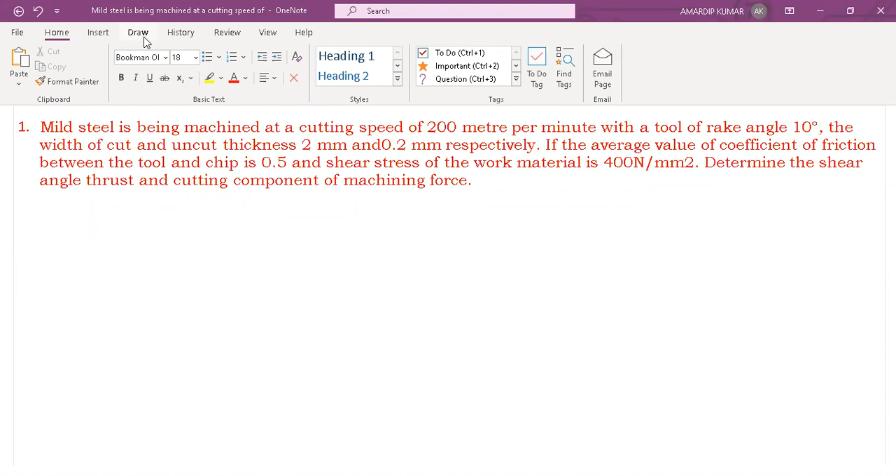Okay, fine. So these are all machining problems. We have already discussed the theory part. So we shall start from this. This is in fact the second problem. Mild steel is being machined at a cutting speed of 200 meter per minute. Means cutting speed is given to you, that is 200 meter per minute, with a tool rake angle of 10 degree.

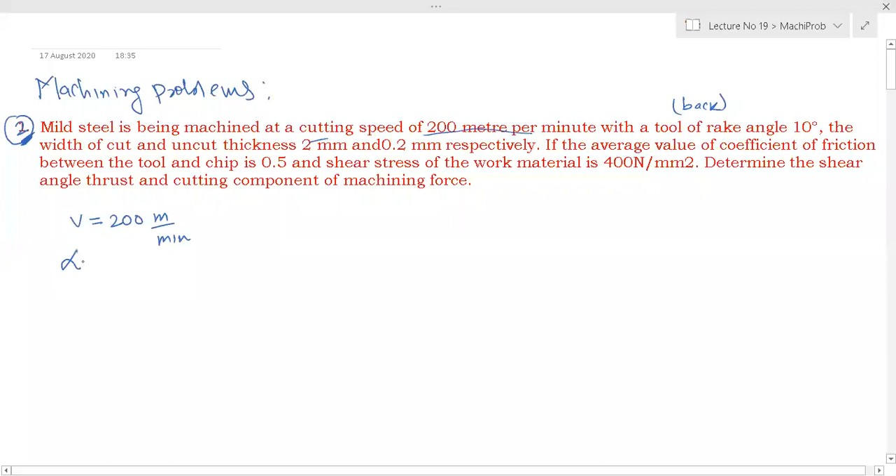So there are two rake angles basically. One is your side rake angle and one is back rake angle. When nothing is mentioned, you assume it is the back rake angle, because back rake angle is the most important angle. So this is back rake angle, that is alpha, that is 10 degree. The width of cut, that is W, is equal to 2 mm.

And thickness means it is not chip thickness, it is your uncut thickness. T naught is 0.2 mm. The average value of coefficient of friction between tool rake face and chip is 0.5. Mu is given, that is the coefficient of friction between the rake surface of the tool and chip, because chip flows over the rake surface of the tool and there is friction, and that coefficient of friction is 0.5.

And shear stress of the work material is 400 Newton per millimeter square. Shear stress is given. Always be careful. Suppose they have given you the normal stress or principal stress, you have to be very careful, because in the GATE examination, or any examination, your brain simply thinks, oh, it is a stress, and you don't think much. So for shear stress, you always take half of the normal stress. That is equal to 400 Newton per millimeter square.

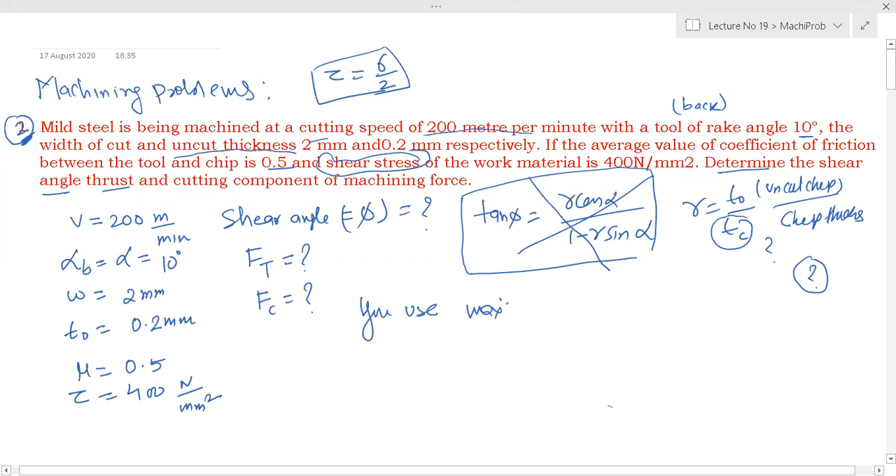So when you don't have information, you use the maximum power condition case. And you know in the maximum power condition, what is the phi relation? 2 phi plus lambda minus alpha is equal to pi by 2. So you use this relation, and pi you take as 180. And what is lambda? Lambda is your friction angle. So tan lambda is equal to mu.

You know what is friction angle? Friction angle is basically the angle between normal and resultant. This is your resultant and this is your normal. This is your friction F. So this angle is your lambda by the definition. And what is R? R is equal to F plus N. This is F, this is N, this is R. So tan lambda is equal to mu. You can calculate lambda. And alpha is given to you.

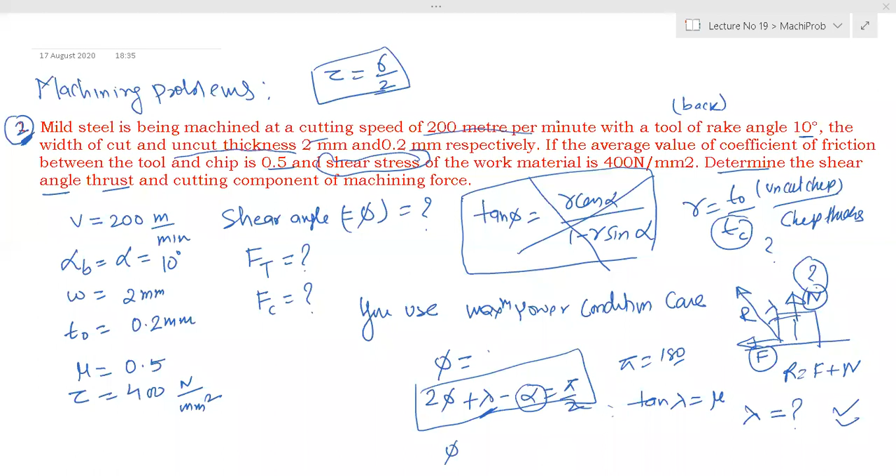Okay. Merchant equation, yes. So what is that phi? Phi value you can estimate from this relation. Phi will be equal to pi by 2 minus lambda plus alpha, divided by 2. From this you can calculate phi, and that phi value comes to be 36.7 degree.

Now, shear angle is already over. What is thrust force and what is cutting force? You know the formula. Fc is equal to R cos lambda minus alpha; we have already derived this formula. And Ft is R sin lambda minus alpha, from the Merchant's relation. But what is R? R is equal to Fs divided by cos phi plus lambda minus alpha. You know phi, you know lambda, you know alpha.

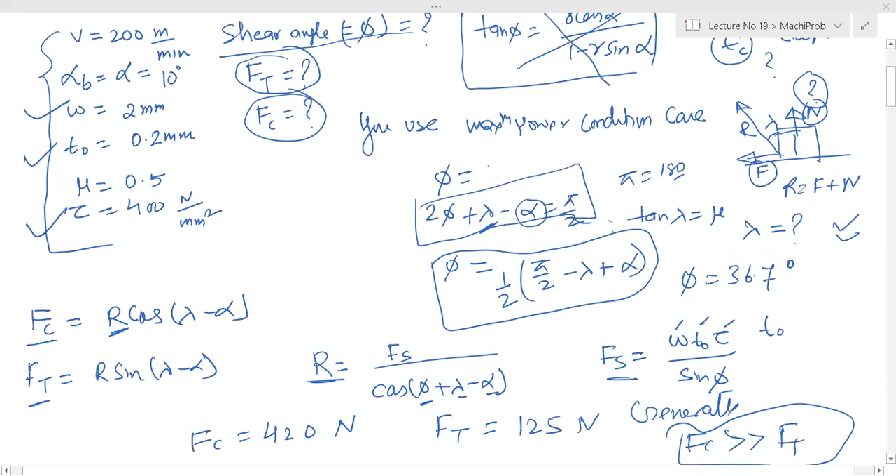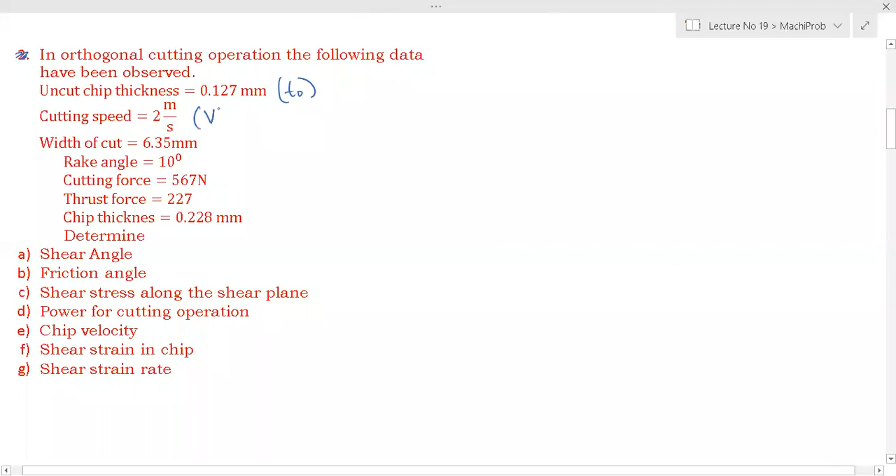Question number 2. In an orthogonal cutting operation, the following data have been observed: uncut chip thickness t naught, cutting speed V, width of cut W, back rake angle alpha 10 degree, cutting force Fc, and thrust force Ft. Here also Ft is less than Fc. Chip thickness Tc is 0.228, which is greater than the uncut chip thickness, 0.127.

Then determine shear angle phi, friction angle lambda, shear stress tau, power P, that is Fc into V, chip velocity V chip, shear strain gamma, and shear strain rate gamma dot.

My computer got hanged, so wait. I will change computer. Yeah, fine.

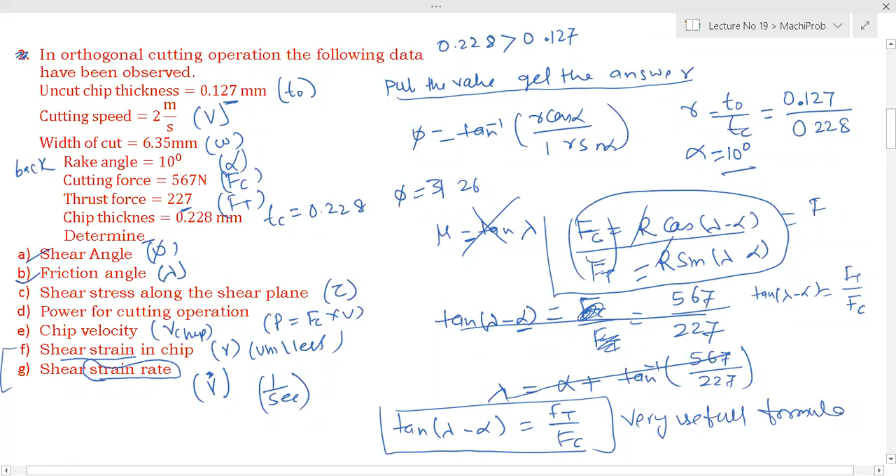Now, shear stress along the shear plane. This shear stress tau will be equal to Fs by As, already discussed, right? Fs is equal to Fc cos phi minus Ft sin phi. You know phi, Fc, Ft, and As is w T0 by sin phi. So you can find tau. Tau will be 240 megapascal. This is the answer.

You have to use this relation. This other relation you cannot use, tau w T0 divided by sin phi, because here are two unknowns. So you find Fs from Fc, Ft, cos phi and sin phi. Then tau, very easy.

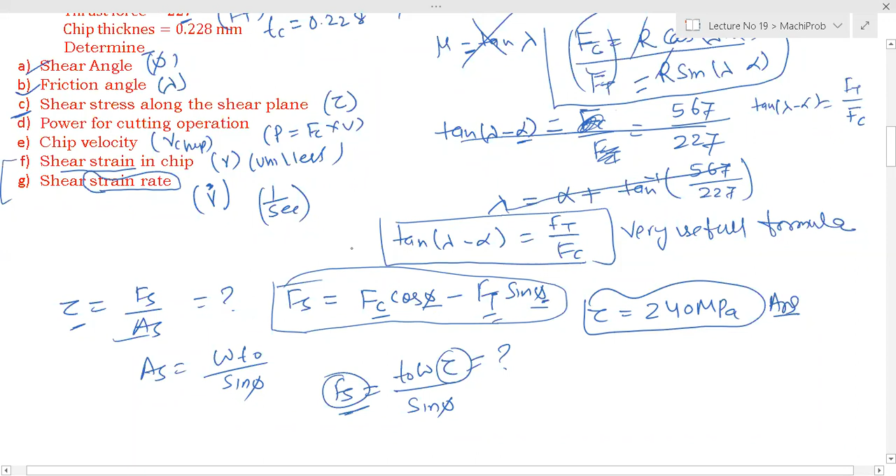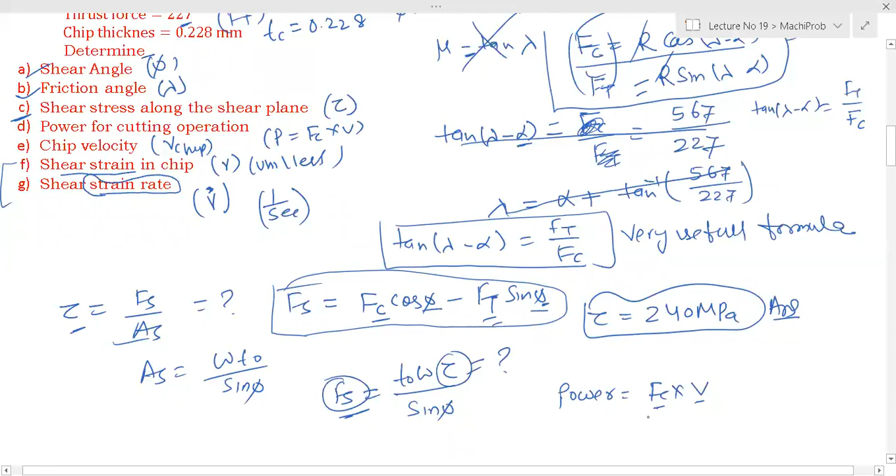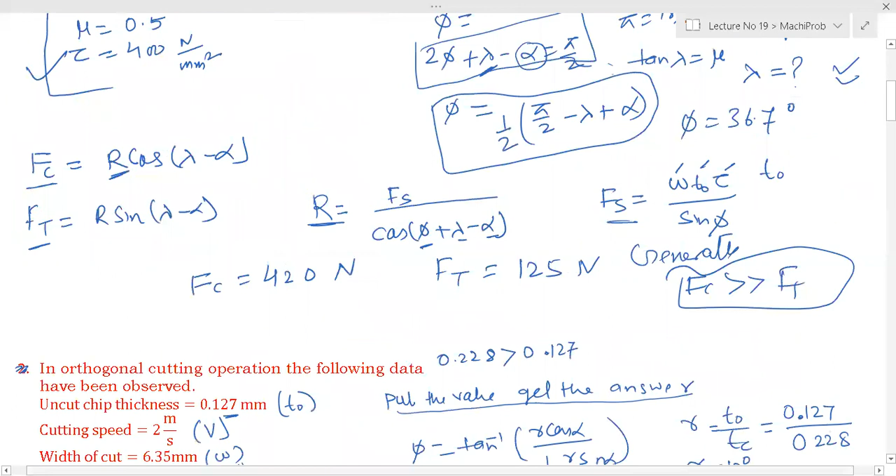Power is your Fc into V. So power, cutting power or machining power, is Fc into V, cutting force and cutting velocity. Cutting force is given to you, cutting velocity is given to you. Where is the velocity? Cutting velocity is 2 meter per second, and cutting force is 567. So it will be 567 into 2, which comes to 1134 watt.

Then you have chip velocity, V chip. You know the velocity triangle: chip velocity, cutting velocity, and shear velocity. V chip is V sin phi divided by cos(phi minus alpha). V is your cutting velocity, that is 2, into sin phi. Phi you have already estimated, 31.26, divided by cos(31.26 minus alpha). Alpha is 10 degrees. What is the answer? The chip velocity, in meter per second.

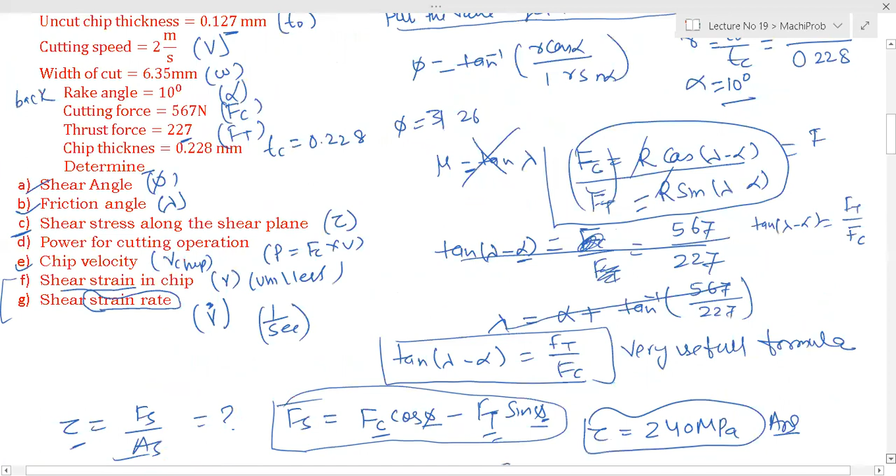Rajat, what are you asking? V is 2 meter per second. What is your doubt? Yes. So V chip will be 1.11 meter per second.

What is shear velocity? Shear velocity is V cos alpha divided by cos(phi minus alpha). What is this value? This is shear velocity: 2.11. So Vs is equal to 2.11.

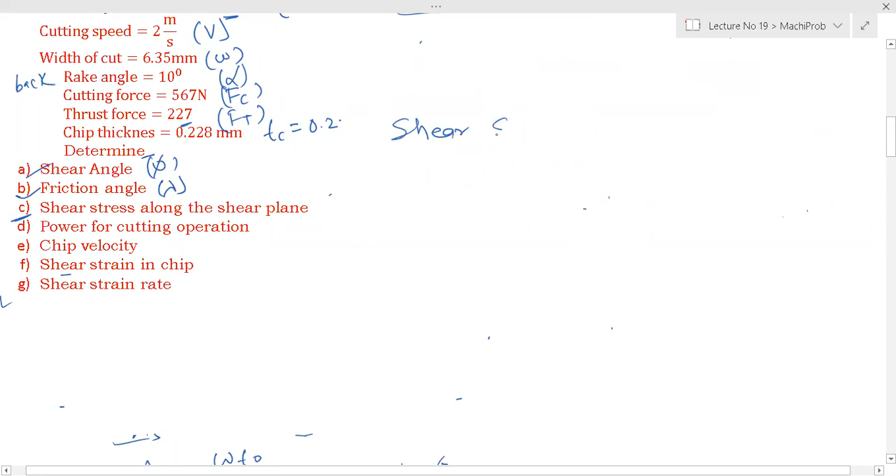Now, one important thing I'm going to discuss, you have to be very careful. One is called shear strain, and another is called shear strain rate. Try to understand these two. We have already discussed gamma is equal to cot phi plus tan(phi minus alpha). This gamma, we said, is tan theta, and this is your strain.

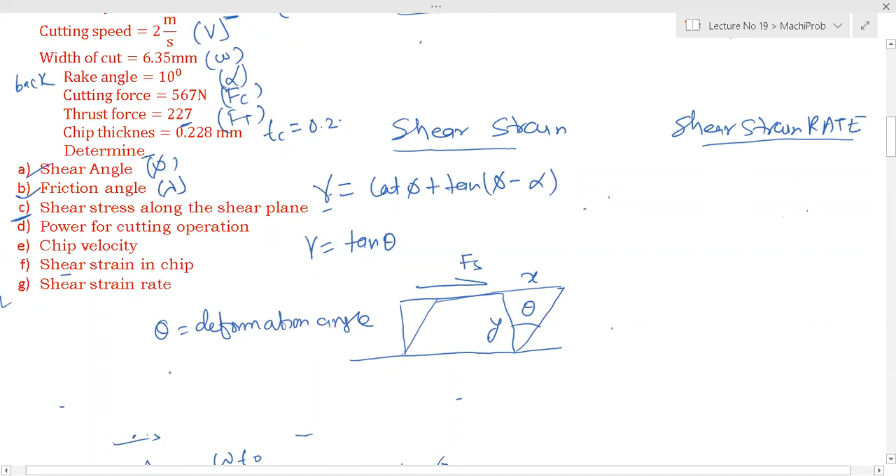When we derived this, we used a very small concept. One force is applied like this, that we call shear force, and the body gets deformed like this. This is your y, this is your x, and theta is your deformation angle, or angular deformation, or simply deformation. And tan theta we call shear strain. So tan theta is equal to x by y, that is gamma, that we call shear strain.

But what is this rate? In fluid mechanics, I will be discussing a flat plate over which a viscous fluid is flowing, and we have a shear stress between the layers of the fluid particles. We'll discuss viscous force and Newton's law of viscosity, where shear stress is proportional to velocity gradient, and tau is equal to mu du by dy.

We'll take an element, one layer, this distance is y, and it is moving with velocity u. Shear stress is proportional to the velocity gradient. At y equal to 0, velocity is 0; at y equal to y, velocity is u. So here fluid is at rest, and when height increases, fluid velocity increases. This du by dy we call shear strain rate.

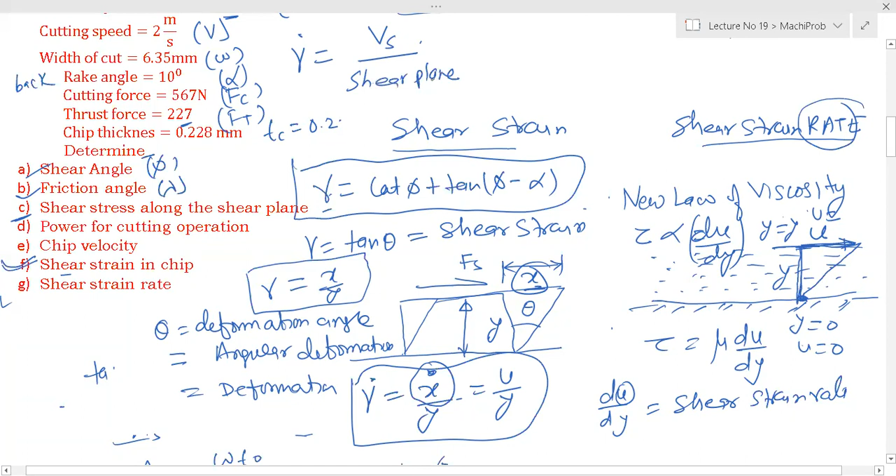But when we say shear strain rate, we have to apply the formula gamma dot is equal to Vs divided by y. This y we call shear plane width, or shear plane thickness, or thickness of deformation zone. So here Vs is your shear velocity.

The shear plane thickness, or thickness of the deformation zone. You have to take here velocity Vs, right now. In this formula, we derived this, right now.

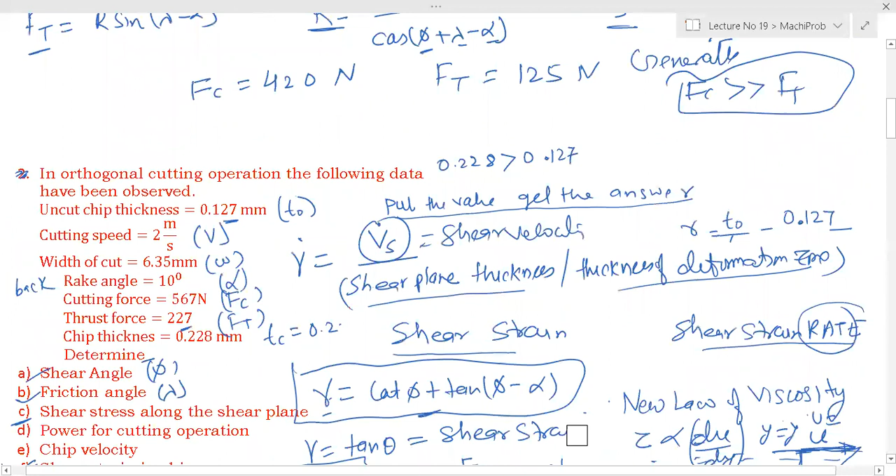You know how to calculate shear strain. Now we are discussing how to calculate shear strain rate, because when you solve GATE problems, your doubt will be cleared. So shear strain rate is equal to shear velocity divided by thickness of deformed zone.

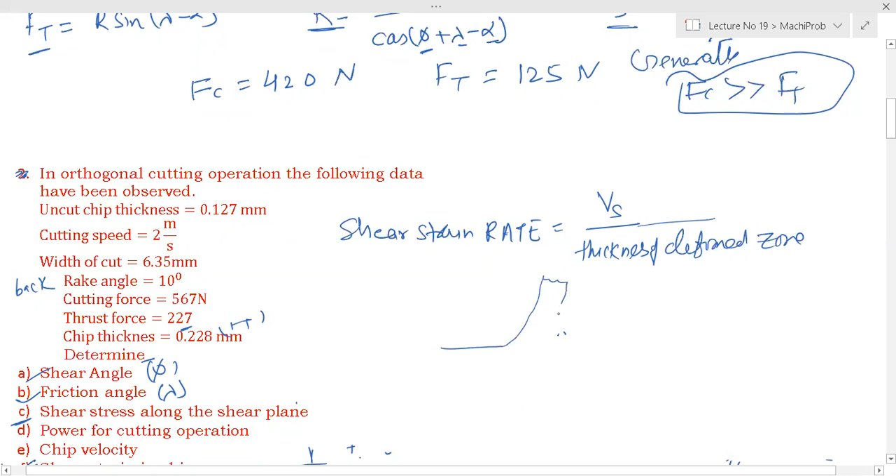You know, this we have already discussed. This is our PET figure, the 2D, right now. This is your O, this is your P, this is your T naught, this is your phi. What is sine phi? Sine phi is T naught divided by OP, and OP is equal to T naught divided by sine phi. That OP is your deformed thickness. The OP is your, this is your OP. Right? So this is the thing, it changes like this. We have already discussed.

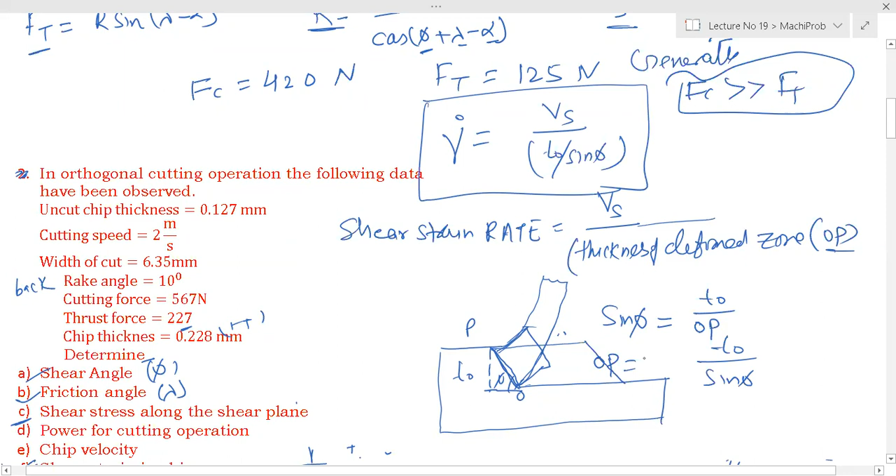So this is OP, your deformed zone. So shear strain rate gamma dot is equal to Vs divided by T naught divided by sine phi. That's all. Everybody is clear? So deformed zone thickness is OP, that OP is your T naught divided by sine phi. This is thickness of the deformed zone.

Everybody is clear? All clear, fine. Now next.

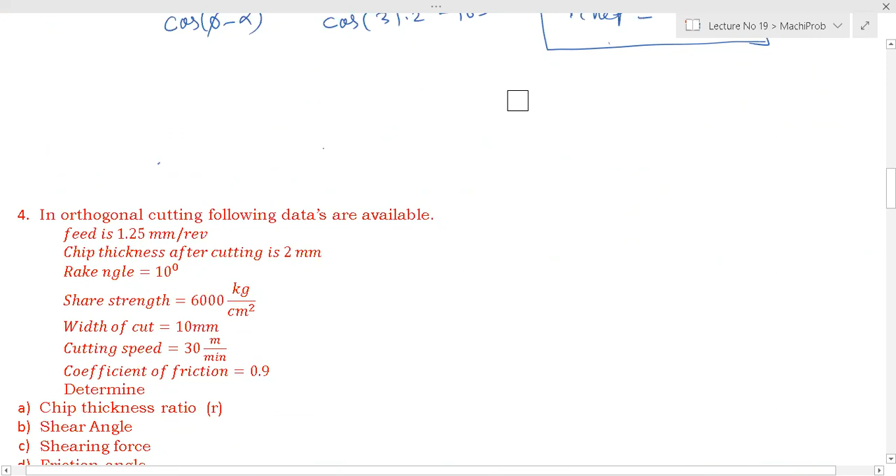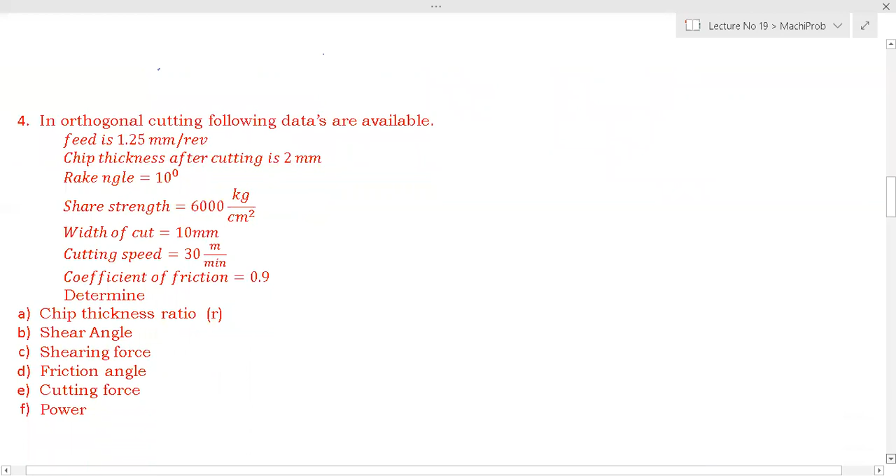Now next problem we'll discuss. In orthogonal cutting operation, the following data are available. Feed is 1.25, that is feed. In an orthogonal operation, the feed relation, feed is also T naught, that is equal to 1.25 mm. Chip thickness after cutting means it is T chip, 2 mm.

Rake angle alpha is 10 degree. Shear strength, it is in a different unit, you take care of this unit: 6,000 kilogram per centimeter square. Width of the cut, when width of the cut is given, it is always related to shear stress or shear force: 10 mm. Cutting speed is very high, 30 meter per minute. It is not 30 meter per second, it is 0.5 meter per second. Coefficient of friction is very high, 0.9, right? 0.9 is also equal to tan lambda, where lambda is the friction angle.

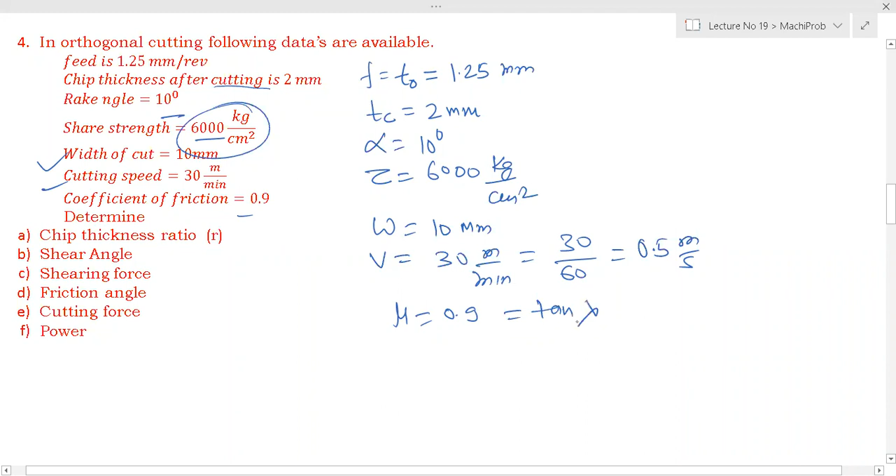Determine chip thickness ratio. What is the chip thickness ratio? R is your T naught divided by T chip. Okay fine, so 1.25 divided by 2 mm, this is your answer.

Shear angle, you use that formula, our PET formula for shear angle: tan phi is equal to... even in GATE they will ask you this simple thing, because don't expect GATE to ask big questions. When you solve 35 years of GATE questions, you will feel that very easy questions are asked. Almost 80% of questions are very easy once you try.

When you solve it, that time only you will understand. What is the doubt, anybody asked?

Clear sir, okay. Is there any need to change velocity? Yes man, you have to change it, you have to take care of the unit, you have to take care of units, and options unit, and unit of options.

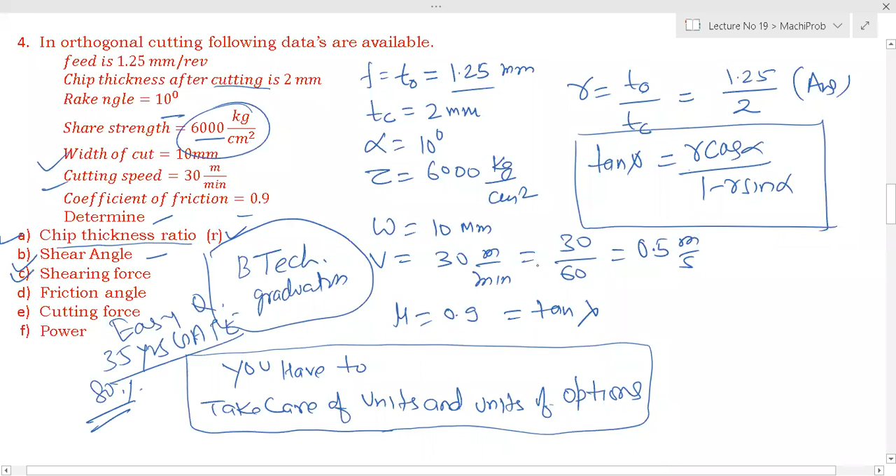Chip thickness ratio already over. Shear angle is over. Shearing force you calculate - very easy. There are two formulas. You use this formula, tau divided by sine phi. You know this formula, use it. You know tau, you know width, you know uncut thickness.

Then friction angle already it is there. So lambda is equal to tan inverse 0.9, it will come in degree. Cutting force you know, Fc equals R cos lambda minus alpha. You know lambda you got from here, and alpha is given 10 degree. R, what is R? R is your Fs divided by cos of phi plus lambda minus alpha.

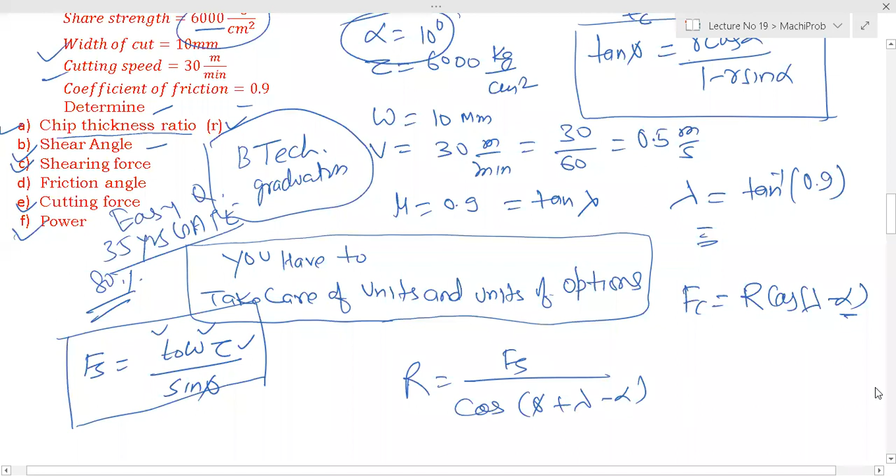Then power, very easy to find. Cutting power, that is cutting force into velocity: Fc into V. So Fc you know from this, and velocity is given 0.5 meter per second. So you can calculate this - V is 0.5 meter per second, and cutting force you estimate from here. So now this problem is solved.

During an orthogonal cutting operation, so what is this? This is your tool signature: 7, alpha, 6, 6, 8.

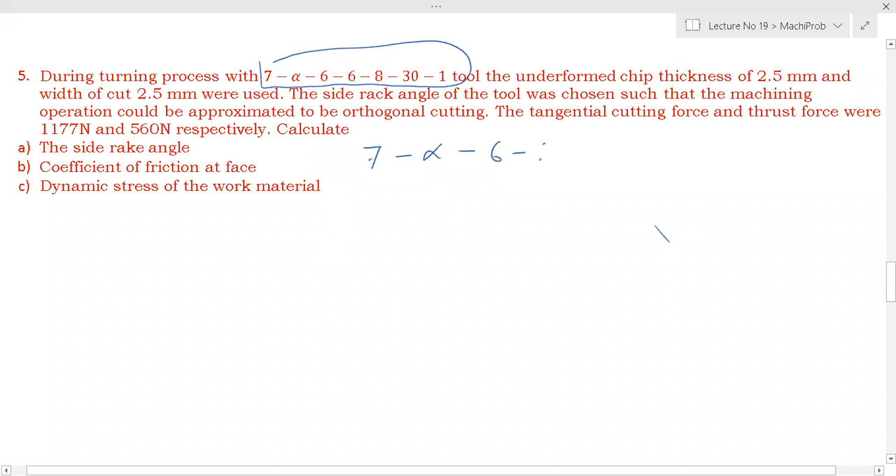So this is the tool signature. Already we have discussed, it tells all 6 angles, and this is your nose radius. Back rack angle - this is your back rack angle. This is your side rack angle. This is alpha S, this is your alpha B, which we also write as alpha.

Then your end relief angle - this is your end relief angle, I said it is E, end relief angle. And this is your side relief angle. And this is your what? Again E, the end cutting edge angle. Already we have discussed cutting edge angle. And this is your again S, side cutting edge angle. And this is your nose radius.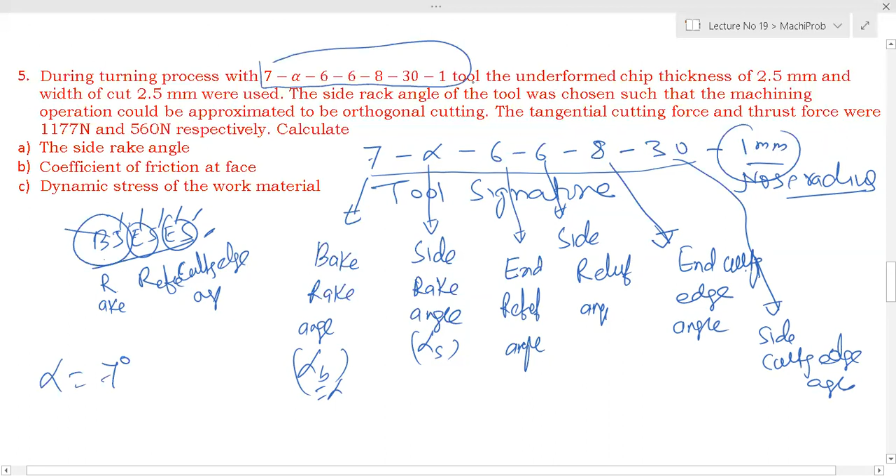It is clear now. So we know what is the alpha here is 7 degree. So the undeformed chip thickness is 2.5 mm. So undeformed means T naught, 2.5 mm, and width of the cut, that is W, is how much? 2.5 mm. The side rack angle of the tool was chosen such that the machining operation could be approximated to be orthogonal.

So side rack angle - what is the side rack angle that was chosen? This is your tool signature, right? No, tool signature. Such that machining operation could be approximated to be orthogonal. The tangential cutting force and thrust forces were this much.

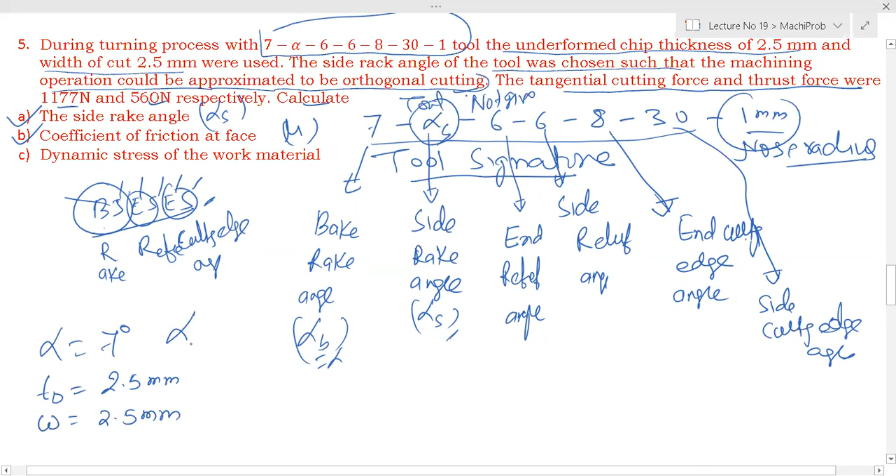Okay, calculate side rack angle, coefficient of friction on rake face, dynamic shear stress - so you have to calculate mu, you have to calculate alpha s. So this is your alpha, right? No, this is alpha. It is not given, alpha s. Basically, you have to calculate this alpha s. Alpha s is equal to what?

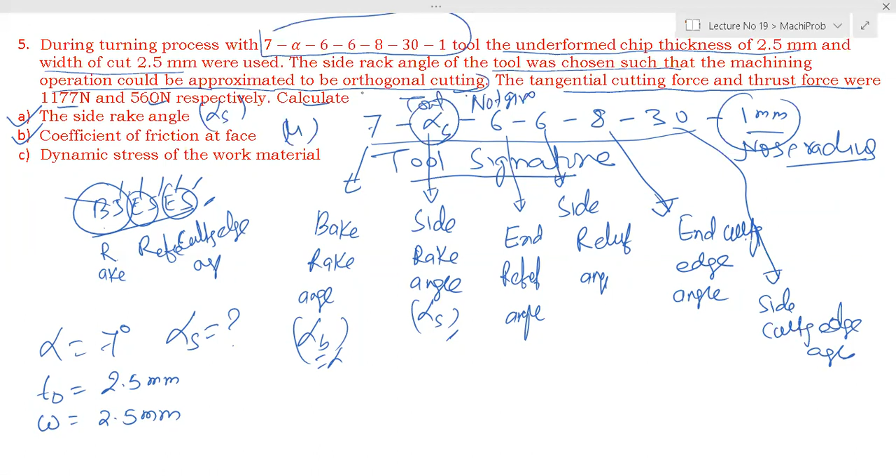So that the machining will be orthogonal. Means orthogonal means cutting edge and cutting velocity are perpendicular. If it is not perpendicular, it is oblique. In all our discussion, it is orthogonal. In all problems, it is clearly mentioned the process is orthogonal. But in GATE syllabus, you have only orthogonal cutting operation - you don't have oblique. Only orthogonal cutting operation is there in GATE.

So when you go into more details, you will find this relation: tan alpha B cos psi is equal to tan alpha s sin psi. Alpha B is back rake angle, side rack angle, and psi is your side cutting edge angle. So this is the condition. This we got from oblique cutting theory. Generally...

Basically, after GATE, or any other examination, if you are much interested in machining, then IIT Kharagpur KGP NPTEL has one video. You watch that, it will take almost 10 hours. They have started from the very beginning, and complete understanding will be there. But that is not useful for GATE because you will be trapped. You can watch and understand that only once you complete your entire GATE syllabus and entire previous GATE question papers. Once you have completed these two things, then you can go ahead - otherwise you will be trapped. Again, I am telling you, because I have watched that video long back, many times even, and I like that, but I don't recommend it to you now.

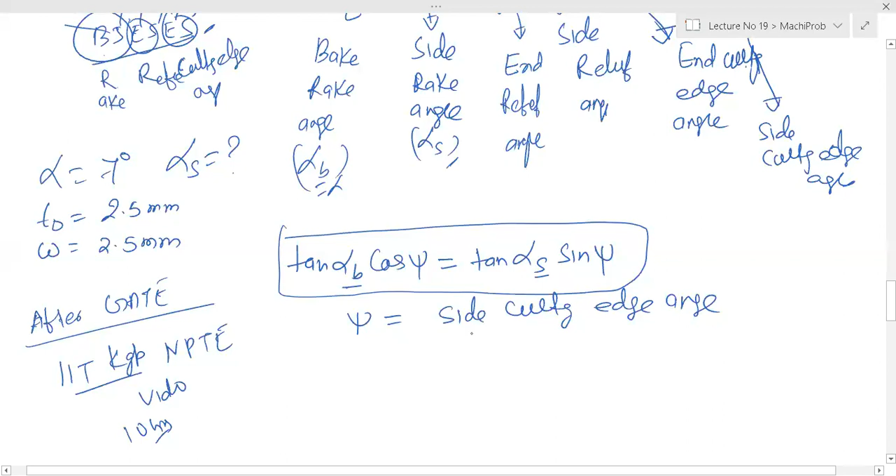From there only, they have put the condition for oblique, and it will be very difficult to understand also because they use complete geometry oblique. Finally, they will conclude and use this relation. This relation will be the condition for orthogonal, and finally you will get this.

So you can calculate alpha s from this. You know this value, remember this. GATE has asked this one time - I don't know whether GATE asked or not, remember. So this psi is your side cutting edge angle. Right now, you can calculate.

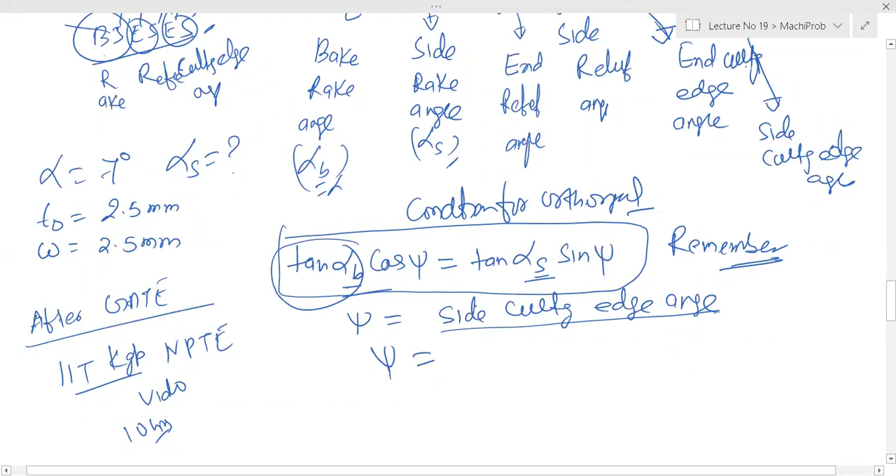Let me check, I missed something.

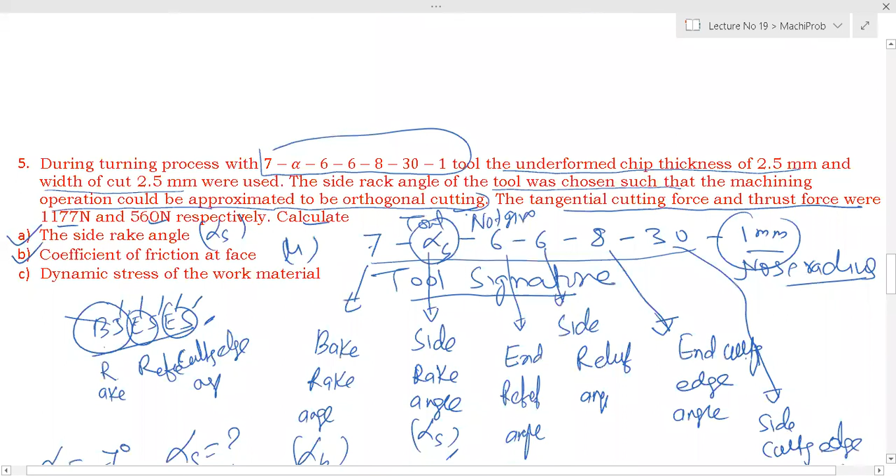The side rake angle of the tool was chosen. So you can calculate this side rake angle, using this - side cutting angle is given to you. This is given, you can calculate side rake. Alpha b is given. Just a correction, and psi is given.

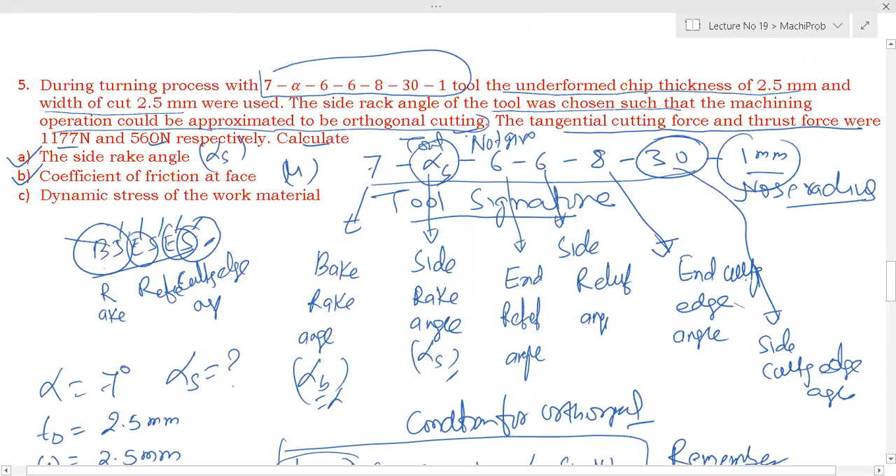You can calculate this. What is psi? Psi is your side cutting edge angle. How much is the side cutting edge angle? BS, ES, this S, that is 30 degree. So we put here 30 degree, and the rake angle is 7 degree.

So tan 7 degree cos 30 degree is equal to tan alpha S into sine 30 degree. So tan alpha S is equal to tan 7 into cos 30 divided by sine 30. You can calculate this. Is it okay everybody? You got this?

Psi is given 30 degree. Fine, fine, fine. Okay, okay, yes. Clear everybody?

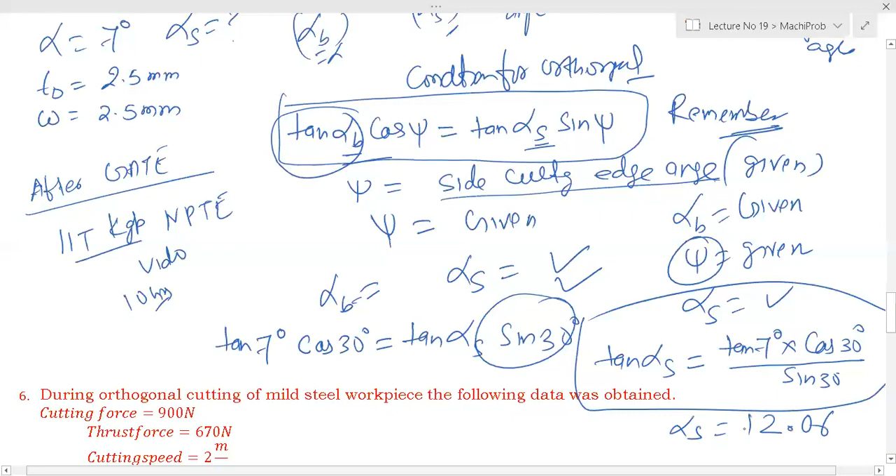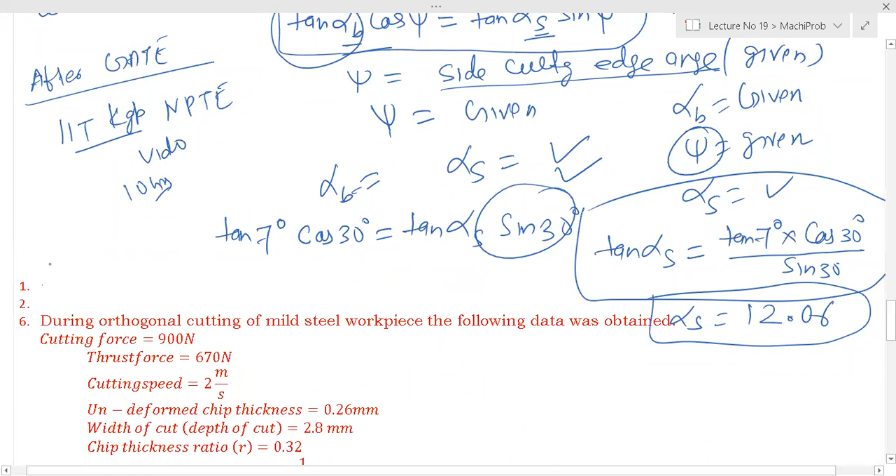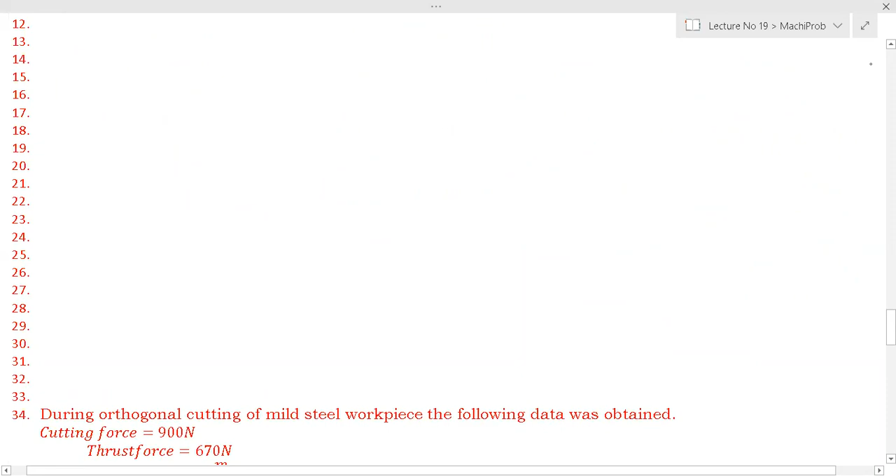Now coefficient of friction. So now coefficient of friction and stress.

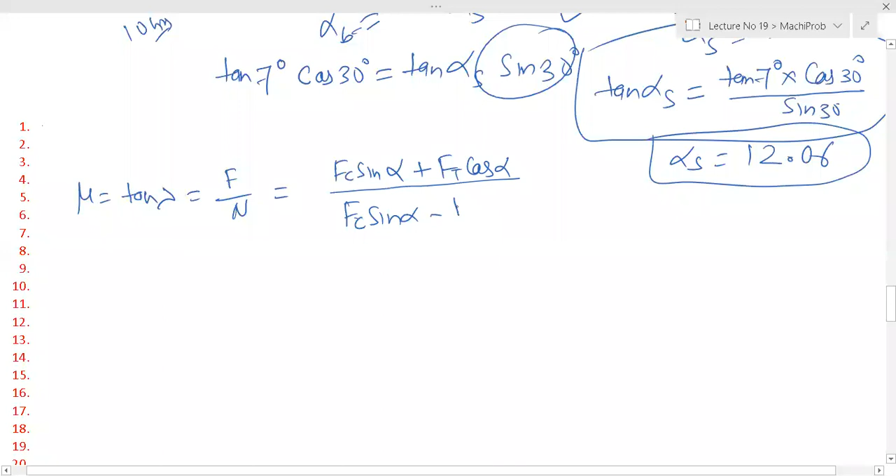So mu is equal to tan lambda is equal to F by N, which is equal to Fc sin alpha plus Ft cos alpha divided by Fc sin alpha minus Ft cos alpha, right?

And then shear stress: force is equal to t0 W tau divided by sin phi, and you can calculate tau, that is Fs sin phi divided by t0 W, dynamic shear stress.

Fc is given to you, Ft is known to you. How much? 1177 Newton, and Ft is 560 Newton. Alpha is already 7 degree. You can calculate mu, and then Fs, you can calculate Fs, right? No.

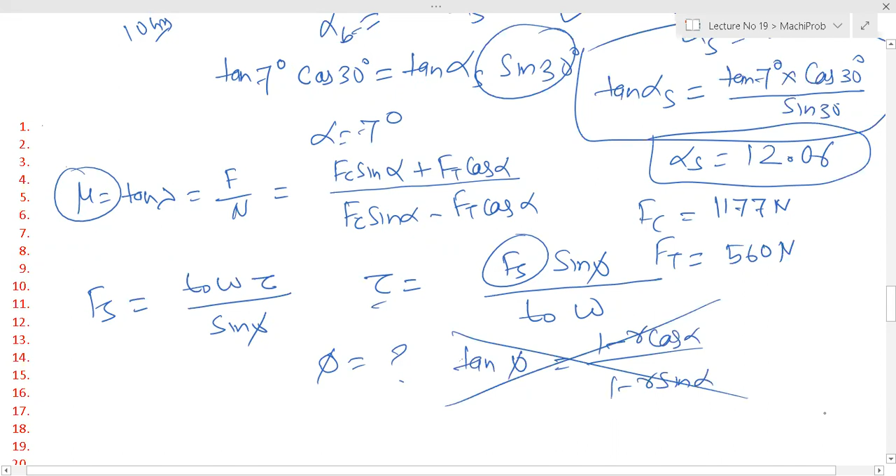But here again one problem is there. How to calculate phi? Tan phi is equal to 1 minus r cos alpha divided by 1 minus r sin alpha. This we cannot use because we don't have sufficient data.

So we'll use that condition: 2 phi plus lambda minus alpha equals pi by 2, that is 180 by 2, right? So you can use this phi, put this in. And Fs you calculate: Fc cos phi minus Ft sin phi. Fs you calculate from here, you put here, sin phi you estimate from here.

It is all about playing with the formulas. There is no concept - we have already discussed how to derive formulas, right? No, you have to wisely use those formulas without any confusion and without any trial. In your mind, there is only one way to approach correctly. That approach comes after a lot of practice. There is no other way.

Again I am telling you, without solving 50 problems 3-4 times, in your brain all formula and everything will not fit. Mind will say no, this will not work, this will not work - ah yeah, this will work.

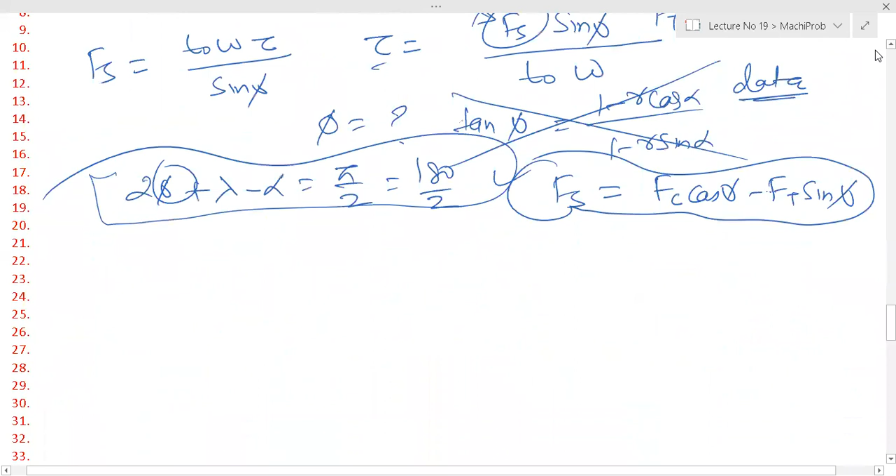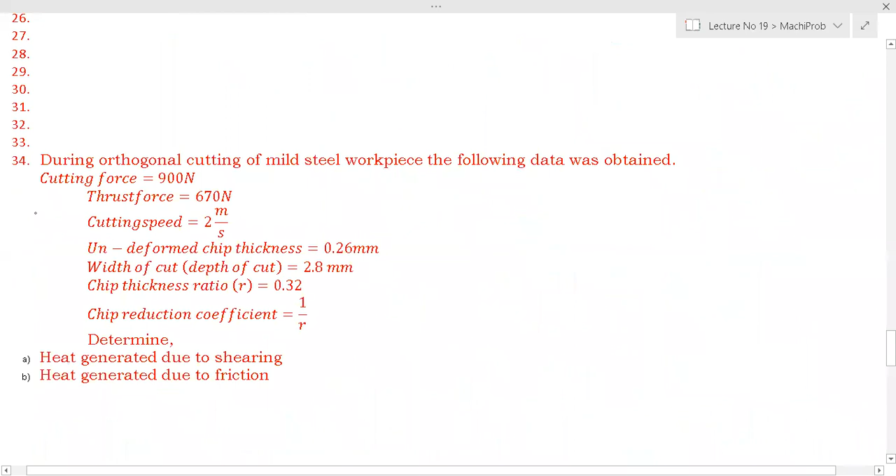During this problem, we'll see. During orthogonal, here what is used is orthogonal. Cutting mild steel workpiece, the following data was obtained: FC is 900 Newton, FT 670 Newton. And again, this Newton force you have to understand also.

There is a feeling. These are all real data. Somebody asks you in some manufacturing engineering interview, how much cutting force do you generally see in a cutting operation? Options they will give you: 5 Newton, 10 Newton, or mega Newton. So it varies between 500 Newton to 2000 Newton or 1500 Newton. So you should feel that.

And what does this 900 Newton mean? If you lift 90 kg, that much force, right? Divide by 10, it is the g value. So 90 kg force. And 670 Newton we can say is roughly a 70 kg force. Means when you lift a 90 kg weight, this much. Okay, fine.

Cutting speed V is 2 meter per second. Not a very high speed, 2 meter per second. How many kilometers per hour? 2 into 3600 is 7200, divided by 1000, 7.2 kilometer per hour. Because this speed we can feel, say 8 kilometer, 10 kilometer, not very high speed. We can feel this force.

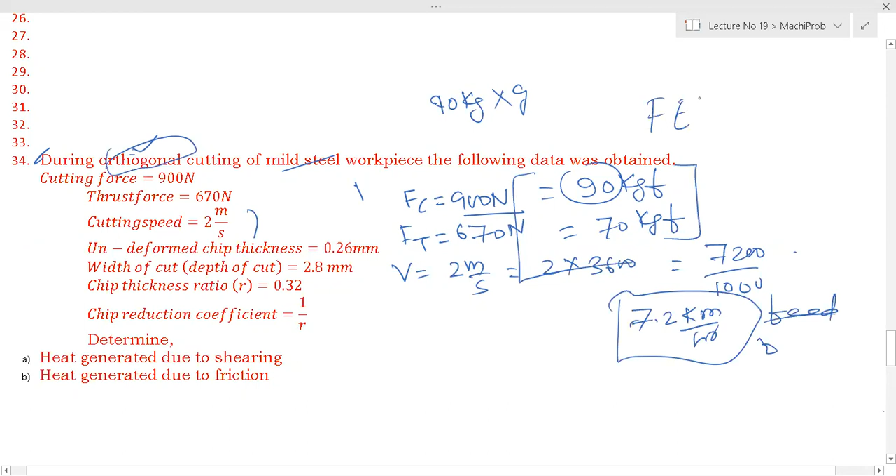Feel the data. Feel the data. 90 kg, 70 kg force means you have to lift 70 kg. You have to lift. Right now, lift 70. This is the speed. Okay.

Undeformed chip thickness, that is T naught, 0.26 millimeter. Once I wrote one GATE examination in a hurry, I was very fast. I used the deformed thickness in place of undeformed, like width of cut or depth of cut, because it is orthogonal. D is equal to 2.8 mm. Chip thickness ratio R 0.32. Chip reduction coefficient, this is just information.

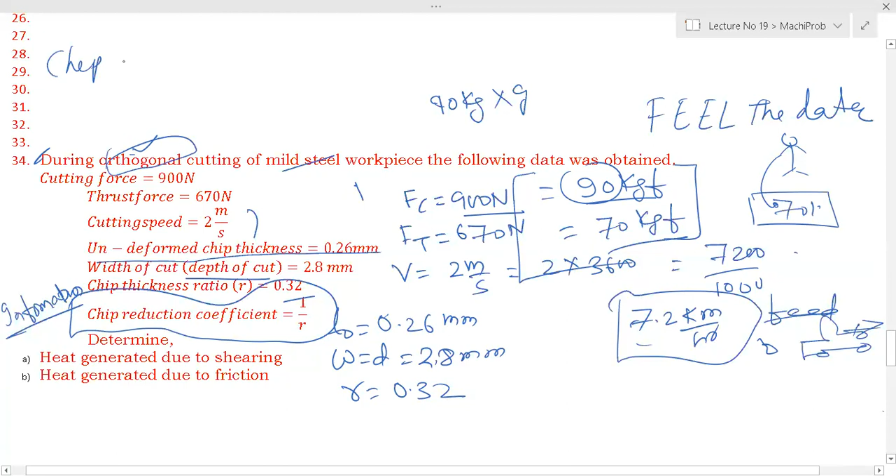If chip reduction coefficient is given, it is 1 by R. Suppose this is given to you, then take the inverse. Determine heat generated due to shearing and heat generated due to friction. What is the issue? No issue. Heat generated due to shearing.

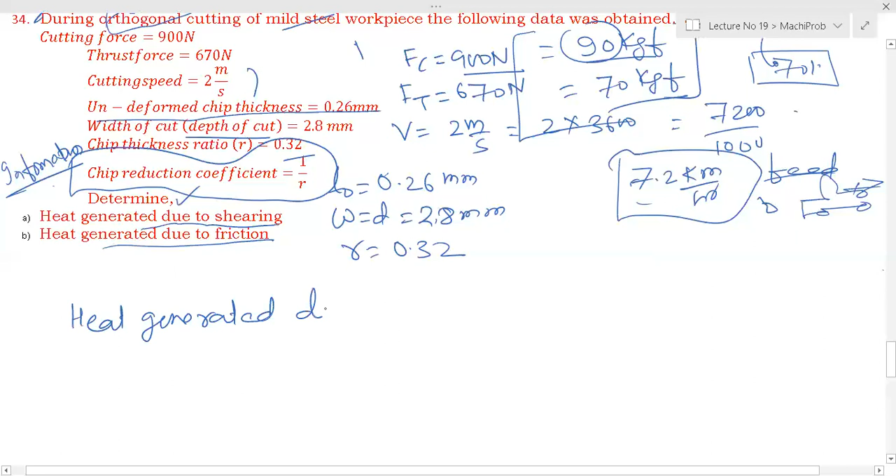Already we have discussed total cutting power is Fc into V, and that is consumed in two places: to cut the material and to overcome the friction. This is friction force, chip velocity, shear force, shear velocity, we have already discussed. So shearing, QS, is F shear force into Vs.

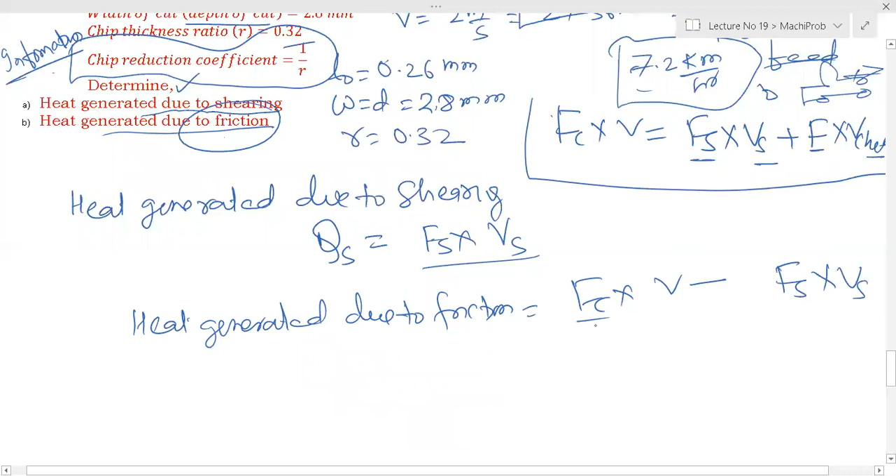Heat generated due to friction will be equal to total minus this Fs into Vs. So cutting force, right? It is given. Not given.

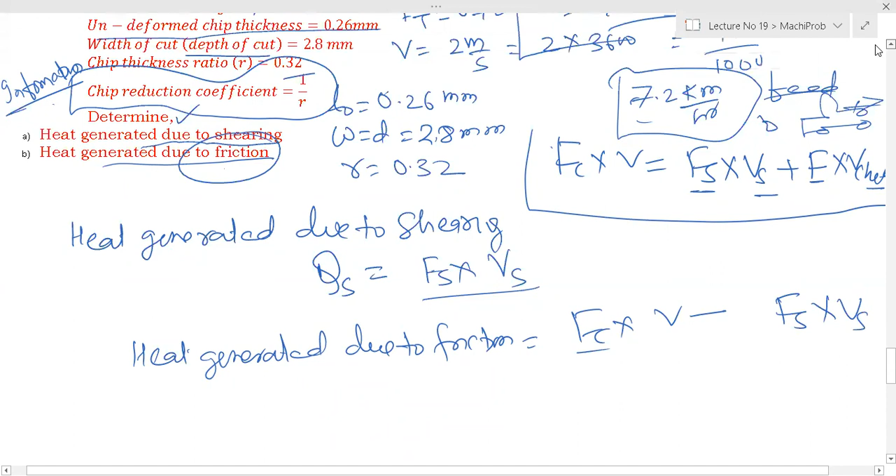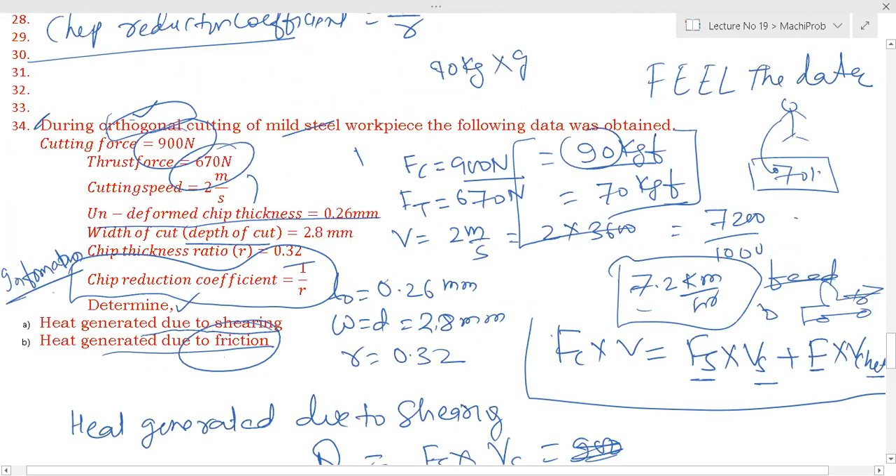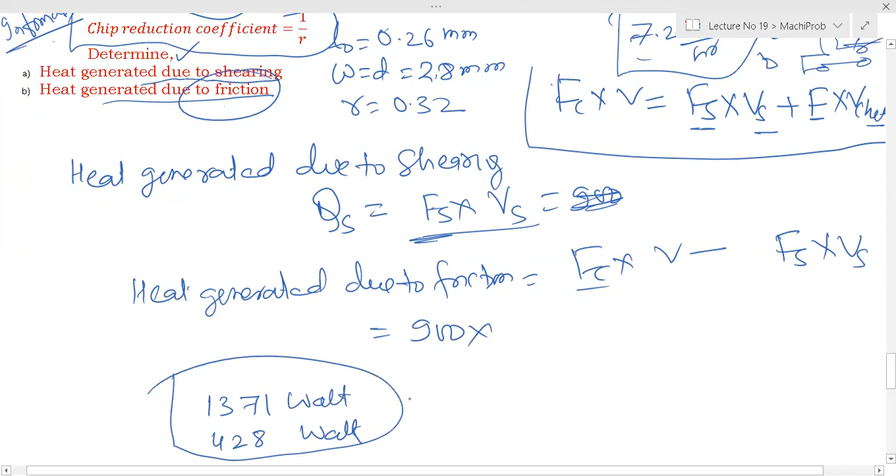Cutting force 900, 670. Sorry, Fs you calculate. How to calculate that Fs? You know how to calculate this Fs. You can do that, right? I am writing the answer: 1371 and 428 watt answers. Everybody following me? Yes, no, maybe.

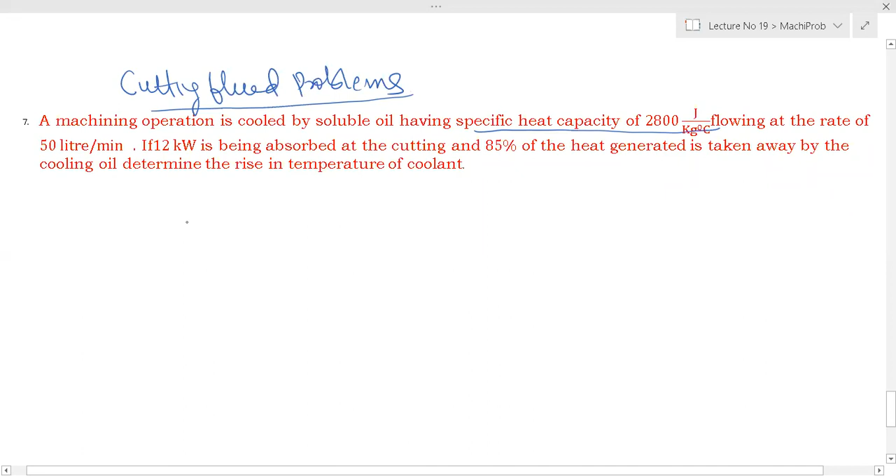Now solve next problem. A machining operation is cooled by soluble oil having a specific heat capacity. It is a cutting fluid problem. Already I have said cutting fluid takes all the heat. Ideally, it should take all the heat, but sometimes it doesn't.

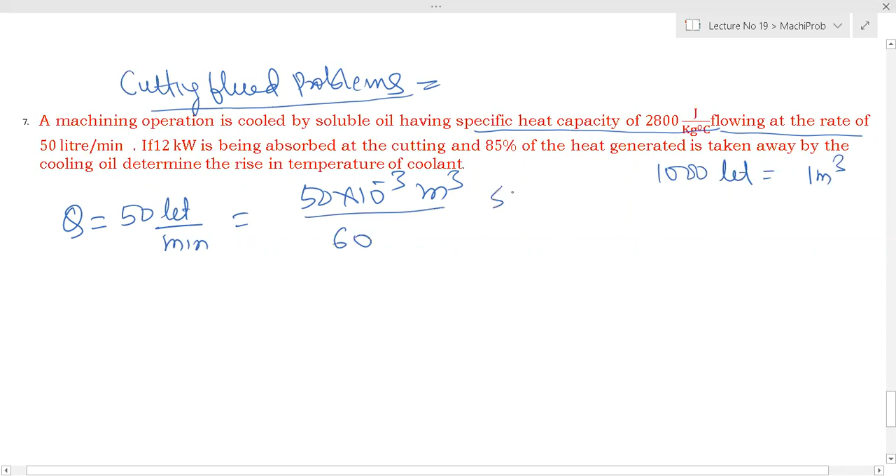Flowing at the rate of 50 liter per minute means Q is 50 liter per minute. So it is 50 into 10 raised to power minus 3 meter cube, because 1000 liter is equal to 1 meter cube, divided by 60. So it will be in SI unit, meter cube per second.

If 12 kilowatt is absorbed at the cutting, means cutting power is given: 12 into 10 raised to power 3 watt. This is the cutting power, equal to FC into V. Total cutting power consumed, how much power is 12 kilowatt? How to feel this? What is the bulb power? 100 watt.

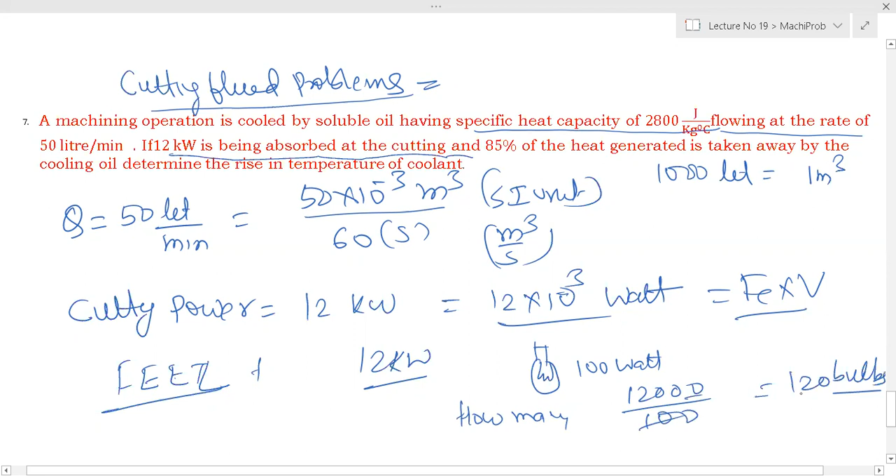60 watt, 100 watt, fine. So how many bulbs? 12 kilowatt means 12,000 divided by 100, 120 bulbs. Am I right? It means my village: every home, suppose one bulb at one house, and you have 120 houses. Can you feel this power? 120 houses, each house one bulb.

12 kilowatt. Suppose you provide one bulb to each house, so 12 kilowatt means 100 watt bulbs. So total will be 120 bulbs, means each house one bulb, right? Am I right or wrong? Am I right or wrong? Nobody is answering, huh?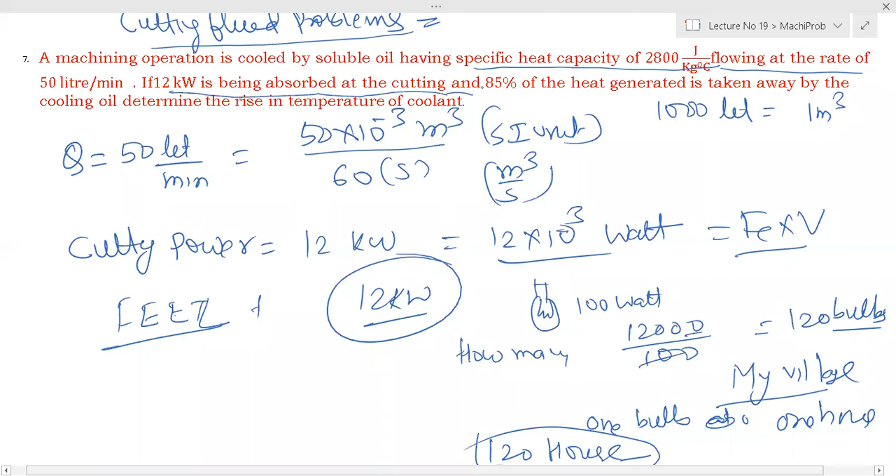What is the Trivandrum electricity charges per unit? Trivandrum, what is the Kerala electricity bill per unit? 8 rupees per unit. 8 rupees, sorry, RS, 8 rupees per unit. 7 to 8, very nice. How much amount

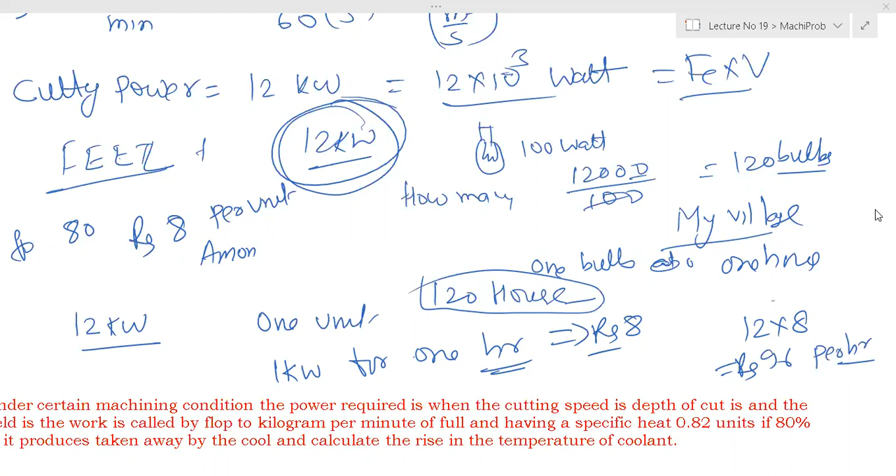9,600? Where that? How much? 96 rupees. So 96 rupees per hour. 96 rupees per hour.

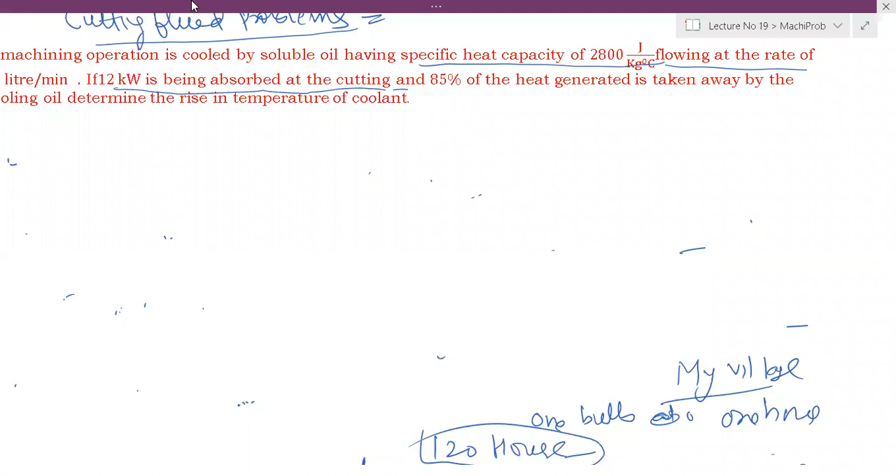So what is 24 hours? 8 hours. Suppose 24 hours, 24 hours per day. 24 into 96. You take it. So it is almost 2400 rupees for one day. 2400 into 30. How much? How much? 72. Am I right?

So per month, if you open a workshop, suppose you have a lathe machine, or you have a shaper, or you have turning, you have to spend this much per month. Almost 1 lakh rupees. What is the machining rate for, suppose, milling? Suppose 1 hour milling. How much? Have you checked? Mechanical engineers, tell me.

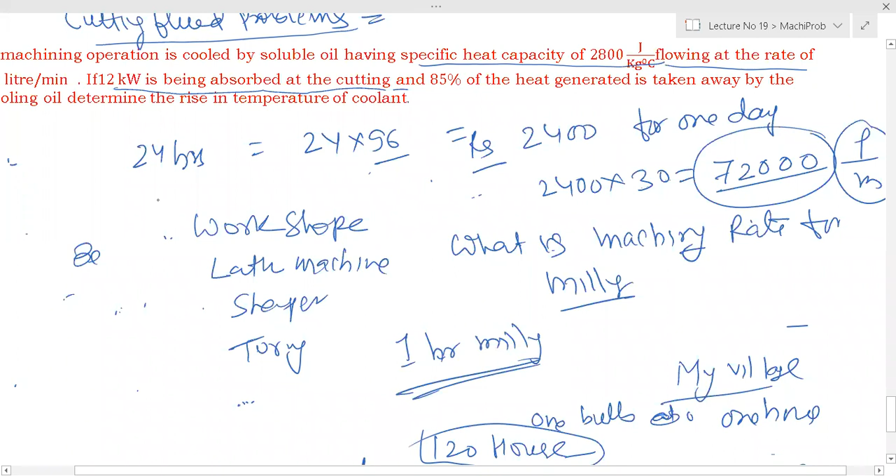Suppose you go to a workshop and you ask, sir, there is a 1 hour work. I have to machine some parts that will take 1 hour. How much will they charge? Mechanical engineers, they will charge you 400 to 500, 500 rupees, because electricity is 100 rupees. Machine cost, labor cost, overheads. What is the profit? Everything will be there.

Depreciation. Getting my point? Whether you guys are following me or just I am talking. What I am trying to tell you, I am giving you the concept of economics of machining. Economics of machining.

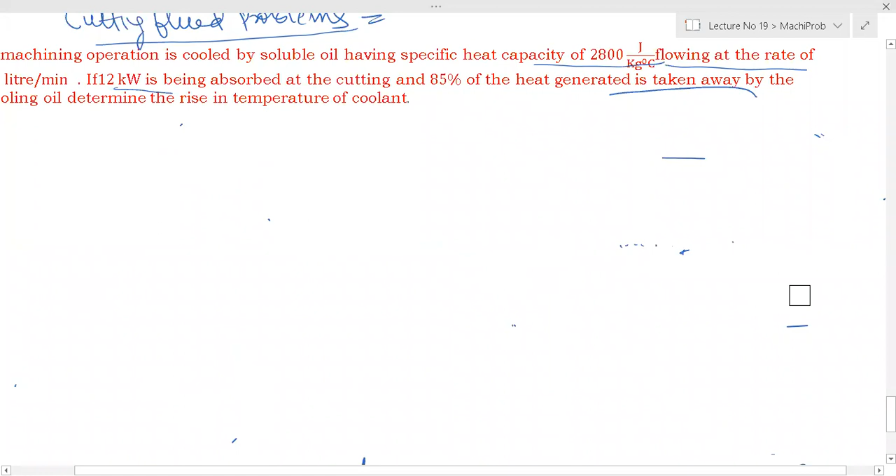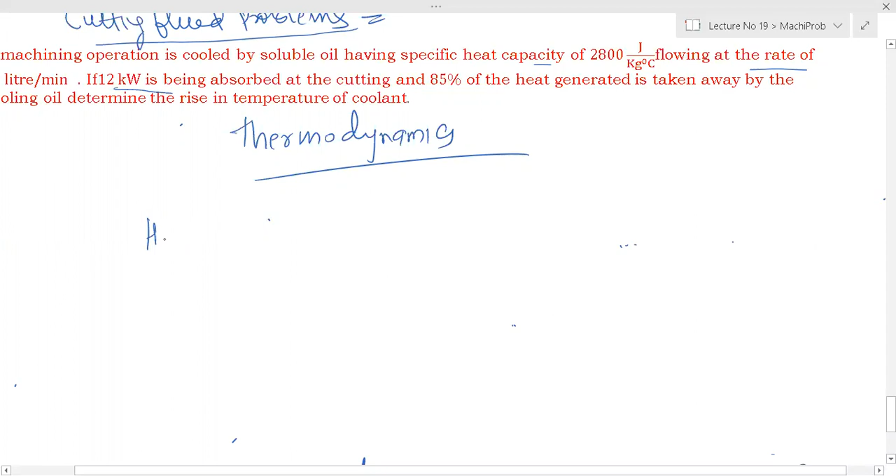So basically this problem is a thermodynamics problem. Thermodynamics. Heat is equal to m s delta T. So 12 kilowatt is being absorbed at the cutting. 85% of heat generated is taken away by the cutting oils, cooling oils, right? So 12 kilowatt into 0.85 equal to mass flow rate, 50 liter.

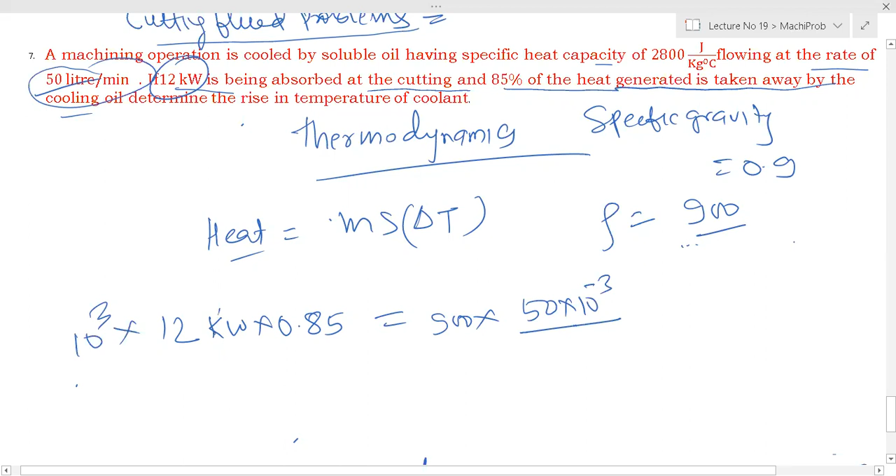Now, so 900 into this flow, 50 liter. 50 into 10 raised to power minus 3, divided by 60, you write kilowatt, you cancel, then into delta T. Determine the rise in temperature of the coolant. So delta T is equal to what? So 0.49 degrees centigrade.

Clear? So m s delta T, this is total power. 85% is taken by coolant, and this is density because specific gravity is 0.9, and this is your flow rate. M is equal to rho Q, and S is your specific heat. Specific heat, how much? 2800. Then delta T. You can calculate this.

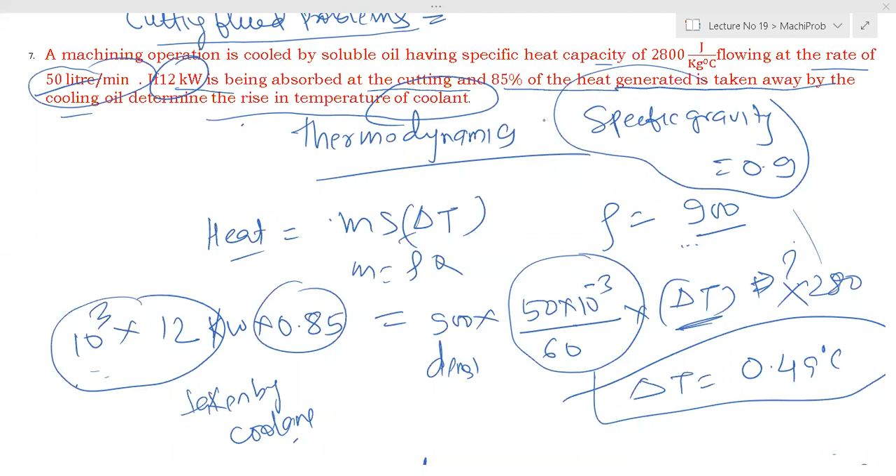I am giving, not given. Mistake. Okay, fine. You take. Clear? Everybody is clear? Bolo bhai.

Similar problem. Metal removal rate is equal to pi d average into f into n. Tomorrow we'll discuss, okay. Tomorrow.